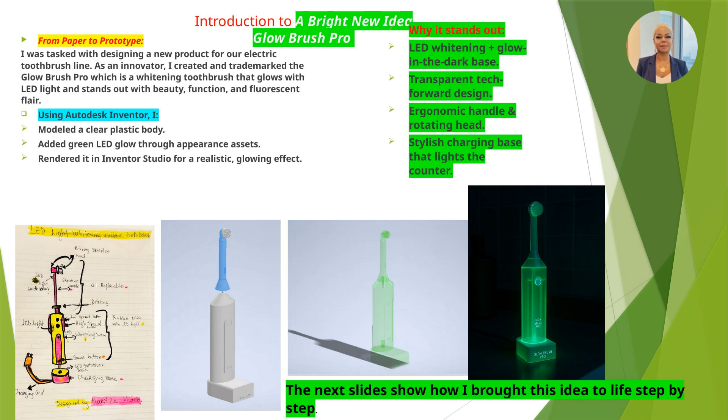I designed the Glow Brush Pro, a whitening electric toothbrush with LED lights, using Autodesk Inventor. I modeled a clear plastic body, added a glowing green LED effect, and rendered it for a realistic look. What makes it unique? The LED whitening, glow-in-the-dark base, ergonomic handle, and stylish charging base that lights up your counter.

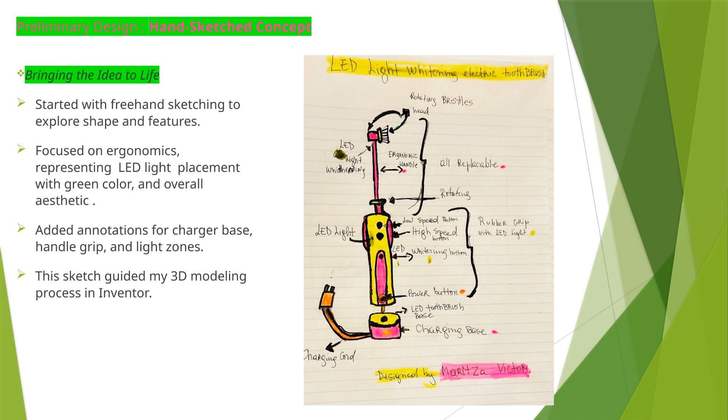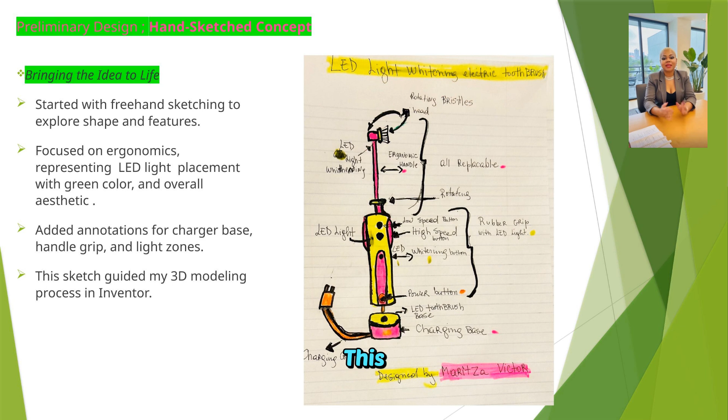I began with freehand sketches to explore shape, ergonomics, and LED light placement. I highlighted the charger base, handle grip, and light zones. This sketch was the foundation for my 3D modeling in Inventor.

To create the charging base, I started by sketching a stable, rounded shape. I extruded the base, added a recessed slot for the handle, and filleted the edges for a smooth finish. I also included a rear port for the charging cable and applied a green LED appearance to simulate the glow. The final render brings the base to life, complementing the toothbrush while lighting up the counter.

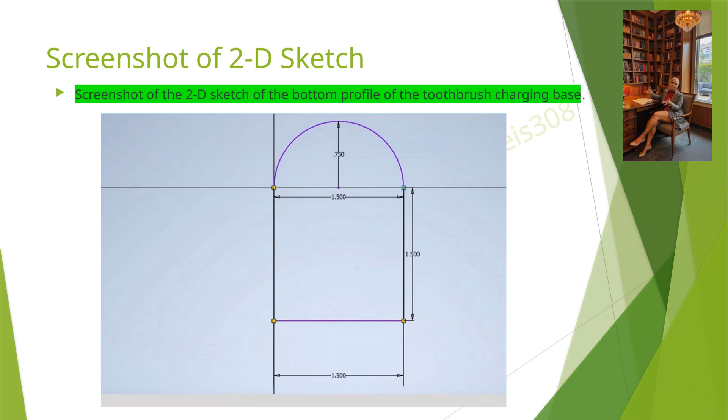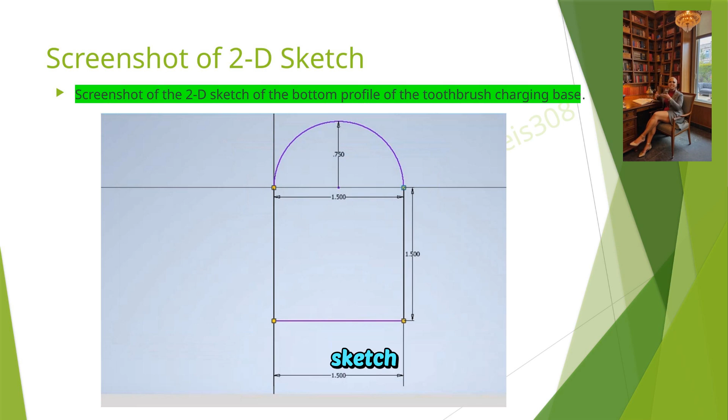Here's a screenshot of the 2D sketch of the bottom profile of the charging base. Using Autodesk Inventor's dimensioning features, I accurately defined the size and shape of the base, ensuring stability and proper fit for the handle. This sketch is a key step in building the 3D model.

Next, I used the emboss feature to add my name to the charging base. First, I created a 2D text sketch of my name on the surface of the base. Then I used the emboss tool in Autodesk Inventor to raise the text, making it visible on the part. As you can see in the screenshot, my name is now embossed on the charging base, adding a personal touch to the design.

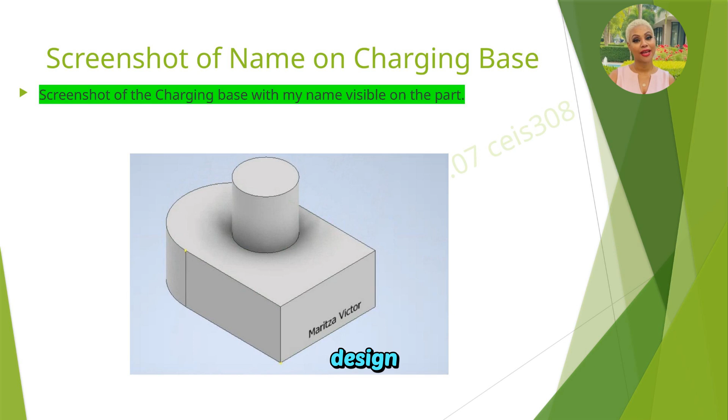Toothbrush handle. For the toothbrush handle, I designed an ergonomic shape that's compatible with the charging base.

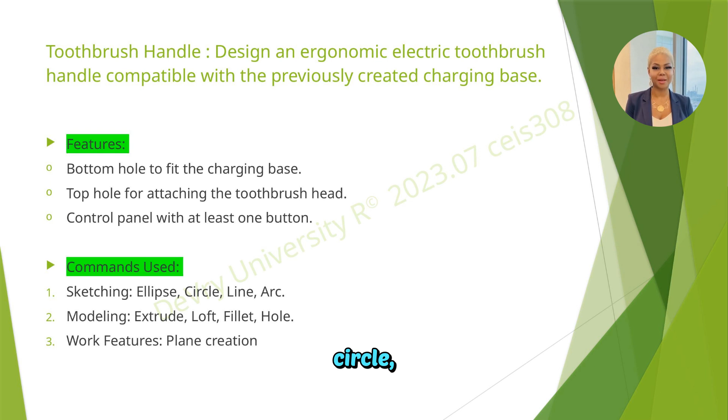It includes a bottom hole to fit the base, a top hole for attaching the toothbrush head, and a control panel with a button. Using Autodesk Inventor, I applied commands like sketching with ellipse, circle, line, and arc, modeling with extrude, loft, fillet, and hole, and work features to create planes for precise design.

I began with a 2D profile and used the loft and revolve tools to create the ergonomic shape. Then I hollowed out the body to house the battery, wires, and LED components. I created a side cut for the power button, aligning it for easy thumb reach.

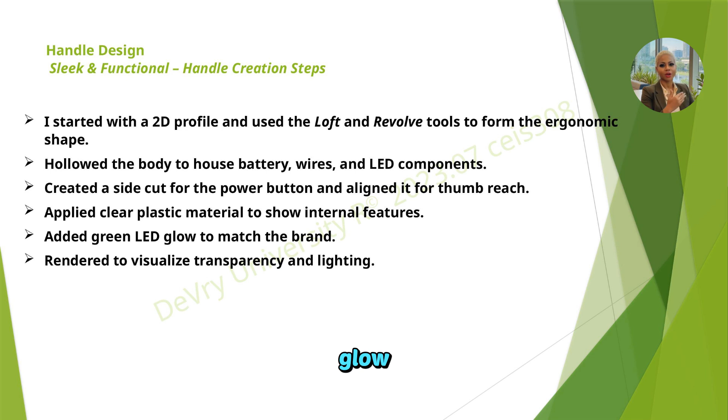I applied a clear plastic material to showcase the internal features and added a green LED glow to match the brand. Finally, I rendered the model to visualize the transparency and lighting effects.

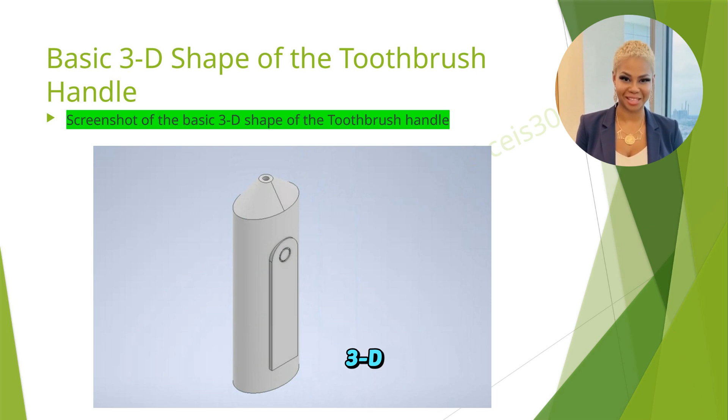Once I finished creating the toothbrush handle, I captured a screenshot of the basic 3D shape to showcase the initial design before moving on to refining the details.

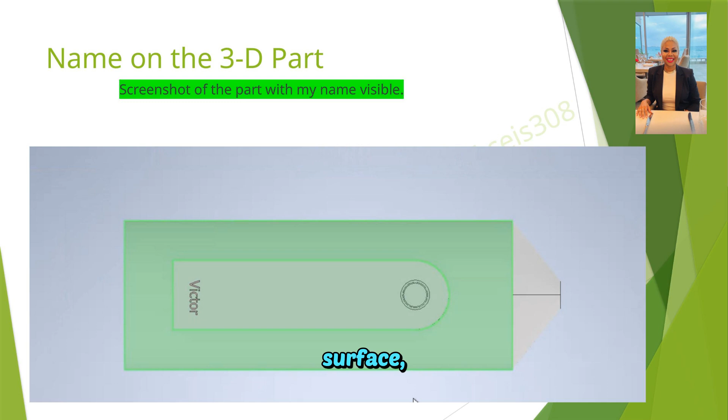Next, I added my name to the 3D part. Using the emboss feature in Autodesk Inventor, I created a 2D text sketch of my name on the surface, then raised it to make it visible. Here's a screenshot showing my name on the toothbrush handle.

To design the ridged head, I began by creating a new part file and setting up the initial sketch on the XZ plane. I sketched a bottom profile with a centered circle, then used an offset work plane to define the bottom section. I applied the loft command to form the solid body and used extrusions to develop the shaft

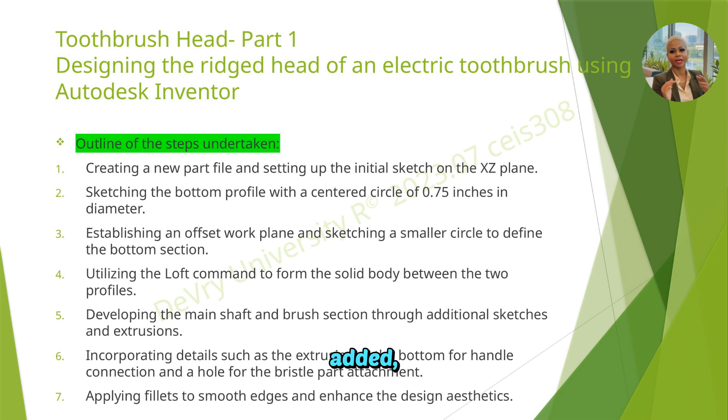and brush section. Details like the handle connection extrusion and bristle attachment hole were added, along with fillets to smooth the edges and enhance the design.

I started a new part file, selected metric units, and created a 2D sketch on the XY plane. Using the line and arc tools, I outlined the side profile, applied dimensions, and fully constrained the sketch. I then used the revolve tool to form the head shape.

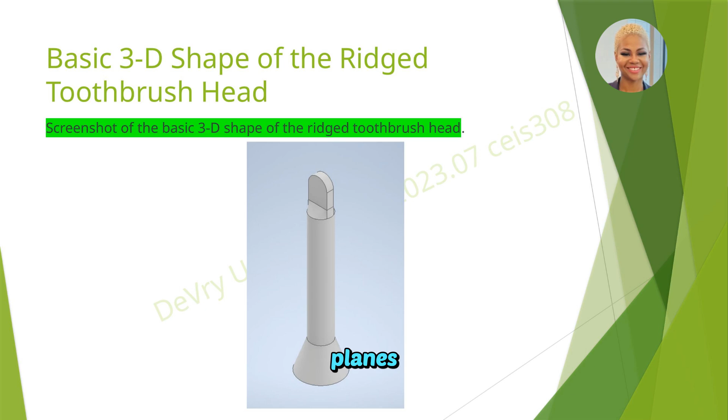I added neck details, created new planes for tapering, and smoothed the edges with fillets for a sleek design.

Now that I've followed the steps to create the ridged toothbrush head, here's the detailed 3D design. The process included starting a new part file, sketching the profile on the XY plane, revolving the sketch, adding neck details, and smoothing the edges with fillets.

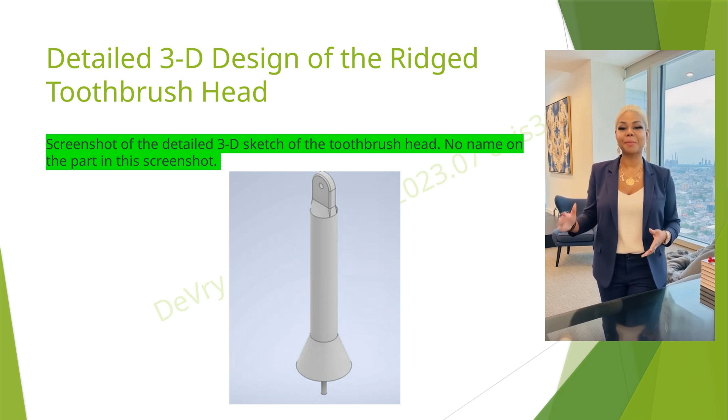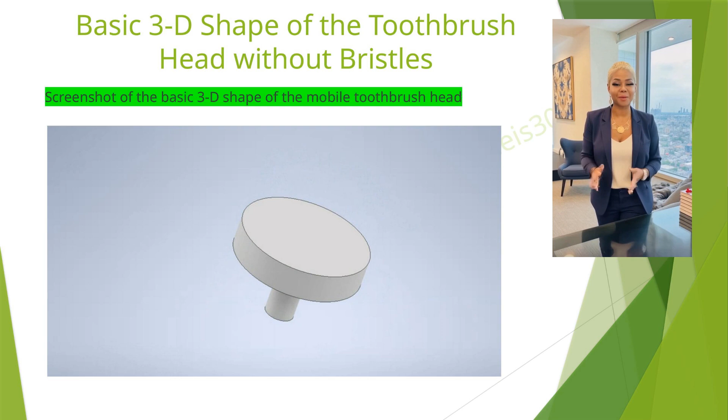I always start by selecting the project file for the project, especially when working on different parts of the same product. In this case, I selected the same file to keep everything organized and consistent. Now that I've designed the basic 3D shape of the mobile toothbrush head without bristles, I followed these steps: I started by selecting the project file, sketched the head profile, and used extrusion to form the shape. After that, I shaped the head to accommodate the bristles. With the basic shape complete, I can now move on to creating the bristles.

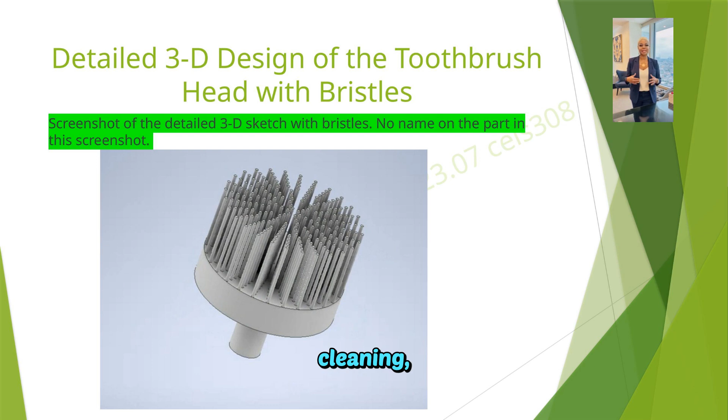Here's the detailed 3D design of the toothbrush head with bristles. I selected a dome-like surface for bristle placement, patterned soft-tapered cylinders, and added translucent material to emit LED light. The bristles were positioned for ergonomic cleaning, and I checked the spacing for real-world use.

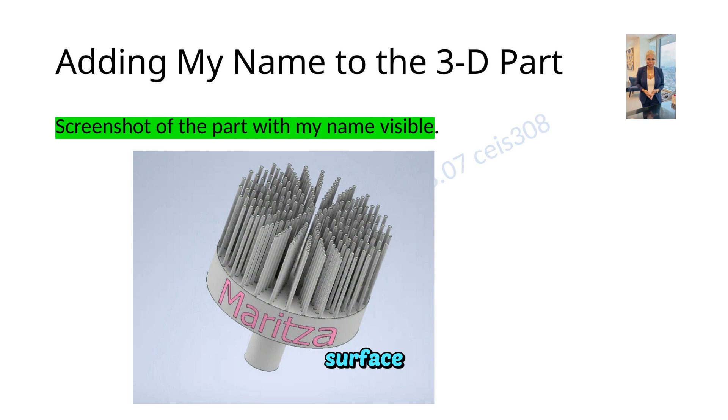Now, using the emboss feature, I added my name, Maritza, to the 3D part. I created a text sketch of my name and applied the emboss tool to make it visible on the surface of the toothbrush head. After creating the different parts of the electric toothbrush, it's time to put them together.

I assembled the base, handle, and rounded rotating head using Autodesk Inventor's assembly environment to form the complete product. Now take a look at the Place Component window. It shows that all the parts are correctly associated with the proper project file. This ensures that each component is linked and ready for the assembly process, keeping everything organized and connected in Autodesk Inventor.

In Autodesk Inventor, I'm making sure the handle is properly placed on the charging base. To achieve this, I'm using the Mate feature, which allows me to align the surfaces of the handle with the charging base. By selecting the appropriate faces and applying mates, I ensure the parts are properly positioned and constrained. A few simple clicks, and the parts are precisely aligned and ready for the next step in the assembly process.

Ensuring everything fits seamlessly, I placed the toothbrush head onto the handle using precise constraints in Inventor. By carefully adjusting the fit tolerances, I ensured that the connection is just right, not too loose or too tight. This attention to detail is crucial for real-world usability, providing both functionality and safety in the final product.

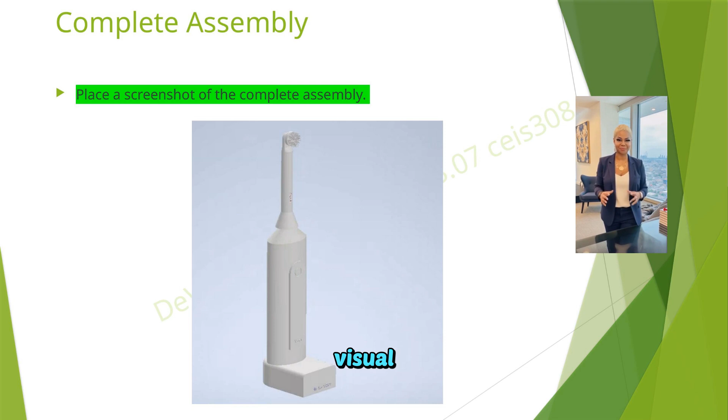I imported each part into the assembly space and applied precise constraints to align the components. After positioning them for realistic motion and ensuring everything fits as it should, I used Inventor Studio to render and animate the final design. This step gave me a clear, visual representation of how the assembled product will function in real life.

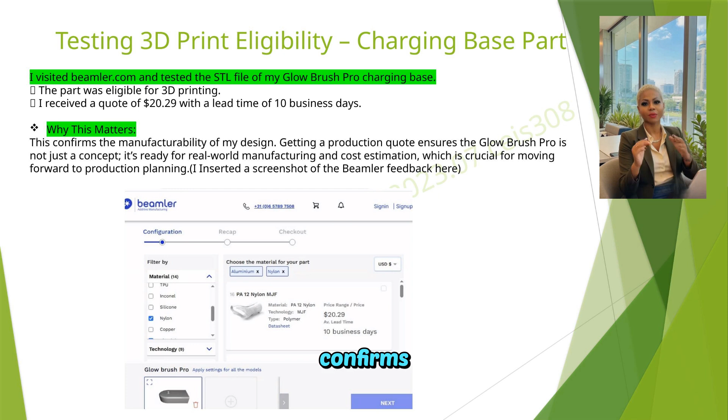I tested the charging base on Beamler.com to check 3D print eligibility. It passed with a quote of $20.29 and a 10-day lead time. This confirms my design is ready for real-world production, one step closer to bringing GlowBrush Pro to life.

The GlowBrush Pro features a sleek, intuitive button layout. One button powers the brush on and off, controls speed modes for customized brushing intensity, and also activates the LED glow. This design combines aesthetics with functional feedback, enhancing both whitening and cleanliness with ease.

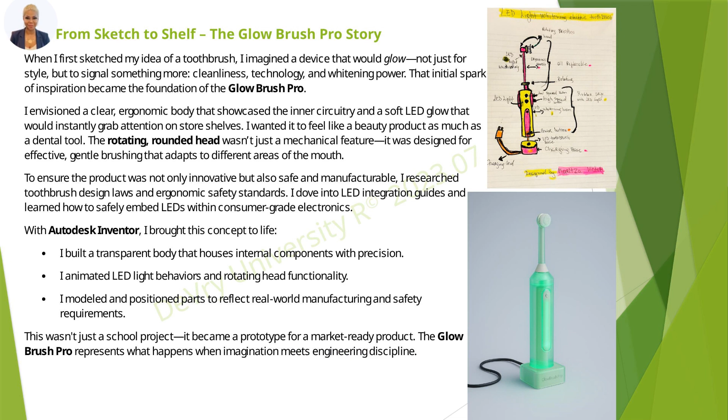From a glowing toothbrush sketch to a market-ready prototype, the GlowBrush Pro story began with a vision of combining style, tech, and functionality. I designed an ergonomic, transparent body, rotating head, and integrated LEDs. Using Autodesk Inventor, I modeled and animated each feature, ensuring it met real-world safety and manufacturing standards. The result? The GlowBrush Pro, ready for the market.

Meet the GlowBrush Pro, where health, beauty, and tech unite. From sketch to prototype, I designed it all with CAD modeling, branding, and real-world problem solving.

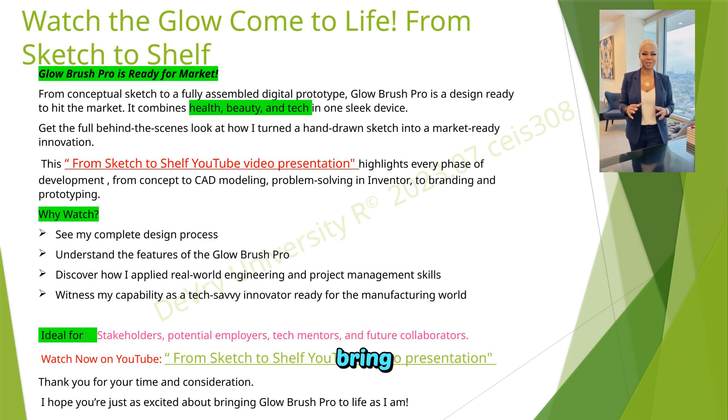This project taught me how to turn ideas into reality using 3D CAD modeling and Autodesk Inventor. I harnessed design thinking, brought my prototypes to life, and even used animation to pitch my concept. Along the way, I gained essential skills in manufacturing, project management, and cross-functional communication. Now, I'm primed and ready to take on roles in smart tech, medical devices, and consumer product design.

The GlowBrush Pro project not only showcased my creativity and technical expertise, but it also proved that I'm ready to lead the way in innovation.